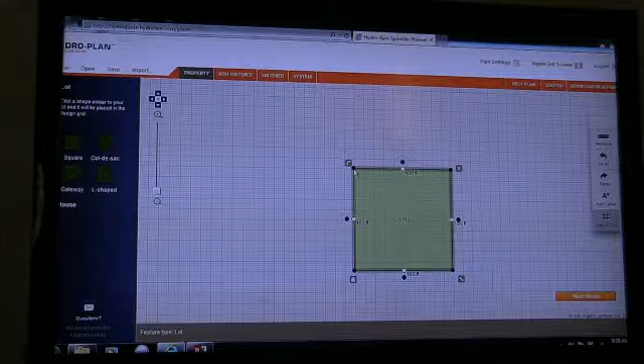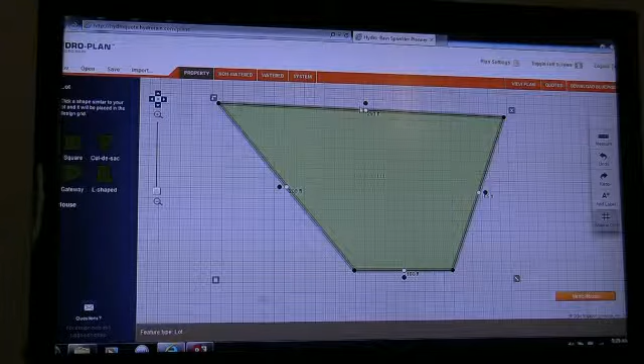So that's boring, right? So we're not doing that. Anyway, I could do it any way I want. So I increased it. I could click in between here.

And it'll give me two other spots. So if I have some kind of funky thing going on, right? Maybe they got some planters here. That's a little much. So you could really manipulate it and play with it, to really see how the layout of the property is.

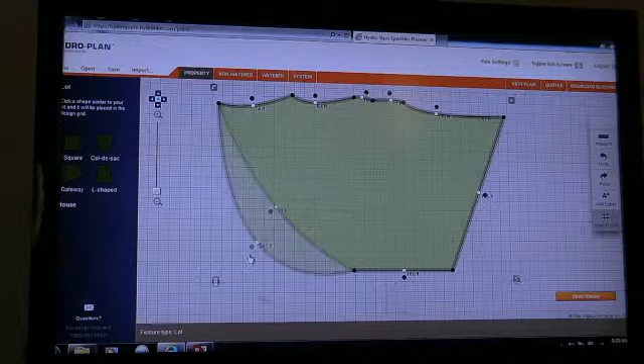Exactly, right, and that's what we want, right? We want something like that. And at the same time, it's giving you measurements right there as well, right? Yeah, this is telling me my footage, right? Okay, I'm gonna do that. So we'll say this is it, right? We have some kind of funky thing going on here.

Okay, so moving on, so next is the house. What type of house is it, right? I like the idea of having a courtyard house, right? That's pretty sweet.

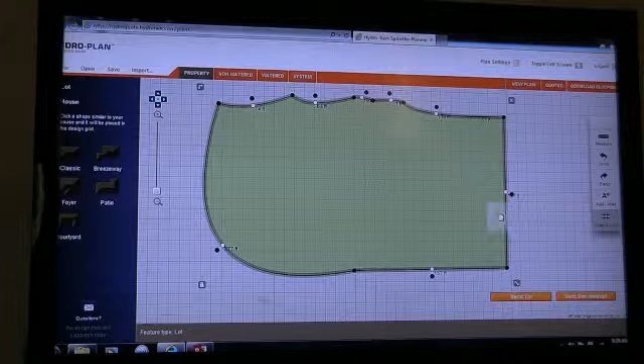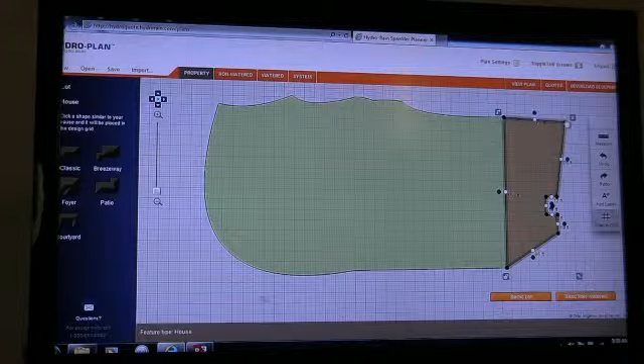Boom, rotate it here and bring it to the edges. And this is some kind of funky looking house, so let me fix that up there. That's a real funky looking house. There we go. So anyway, something like that, right?

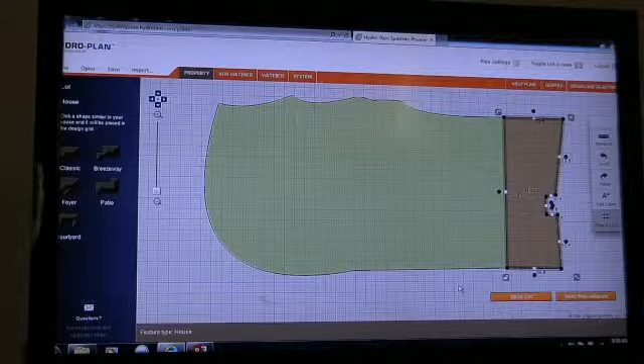So we got the house. Just for completion, right? Why do I need a house? I'm not irrigating the house. Well, I want to know, hey, I need to place my valves. I want it by the house, my electrical, my water meter, stuff like that. So there's a method to all this madness.

So now I'm going to click non-watered. So this could be all grass or not, you know.

Well, this is my dream house we're building, right? So of course I'm going to have a pool. Well, shit, I want a pool, right? So, pool, turn the pool around.

So this is where it gets important because it's going to design around this pool. 50 foot long for an pool.

So for an existing pool, you also utilize this and put it in place so that way you're telling the system where not to water? Yeah, we're in the non-watering thing, so it says mulch, sidewalks, everything's in here.

Okay, so I got a nice deck. I said deck. Don't put words in my mouth.

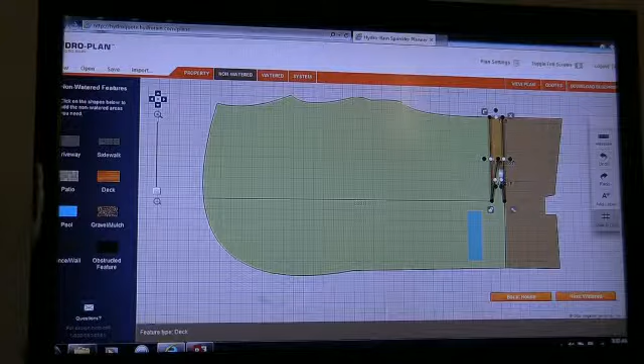Okay, so there we go. A nice deck. You can put driveways in case you're doing the front lawn or something like that.

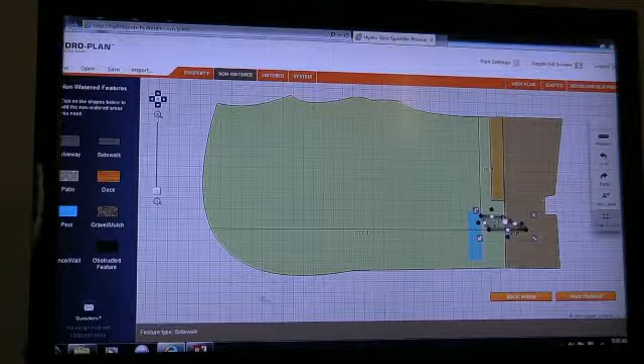We'll just put a little sidewalk here. We're just doing this for ourselves, so I don't want to get too into it - this becomes a game, like we're doing The Sims or something. Okay, so there's my sidewalk to my pool, blah blah blah, fencing.

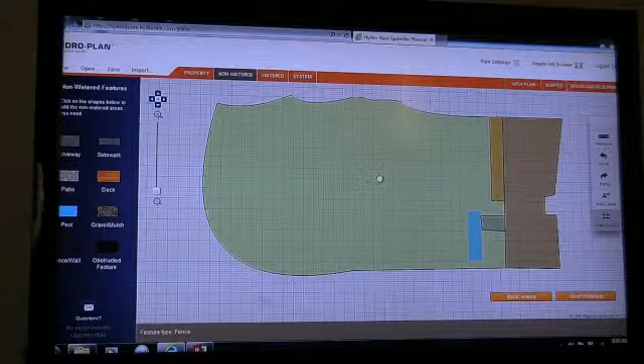If I have a fence, you could lock it so I don't adjust it. I could use that button to click it out. So if I have a fence around here, we're gonna say we don't have small children, so we're leaving it open.

Okay, so trees - this is important, right? Trees are very important, so let's move the tree here. Oh, double the trees. The cool thing about this is you want to do canopy area. Well, I got a big tree, right?

Hedges, shrubs, flower beds, right? So I click flower bed.

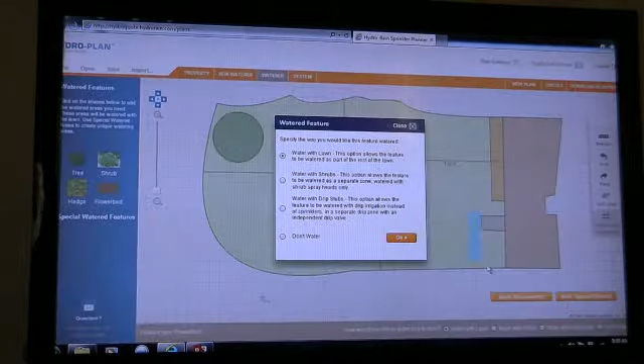Here's another interesting part where we can do it. We got options - water with the lawn, right? We all know that's not efficient. Water with shrubs - if I have any shrubs, I'll water it the same. Or do I want to water with drip? It'll ask me that, so that's important.

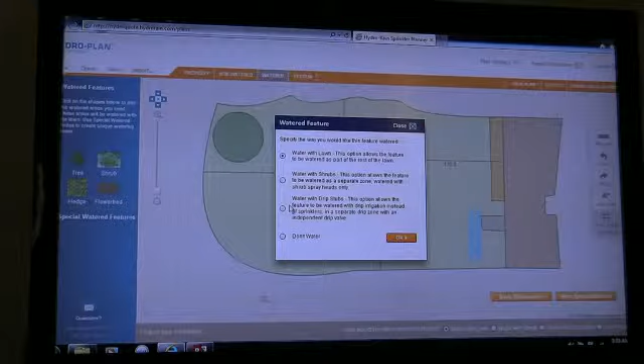So if I click drip or don't water - hey, this is my flower bed, this is my garden, I want to hand water this - it says okay, then it'll take it out of the equation. So there's a lot of flexibility in this.

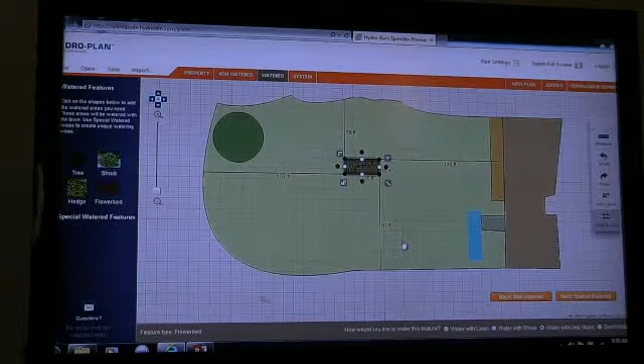This is things that we want to look at. Okay, so I want to do it with drip. I'm going to put it over here. I can't put it by the pool - the chlorine will kill it and all that kind of stuff. Alright, so I got a flower bed there and that's going to be drip. That's my little garden, so I come outside and do that.

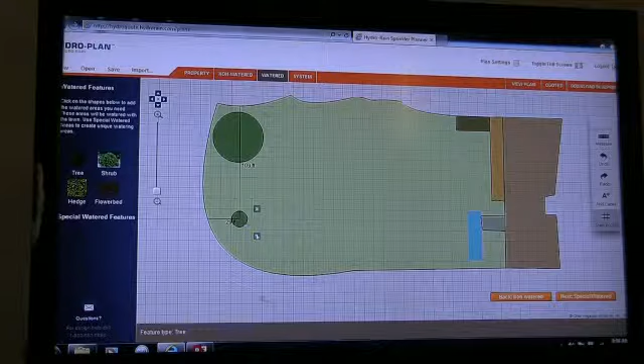Okay, shrubs, hedges - let's go ahead and put another tree because I love trees. Now I'm just doing this for fun. Okay, so I know there's a point - I mean, there's a point to all this. Alright.

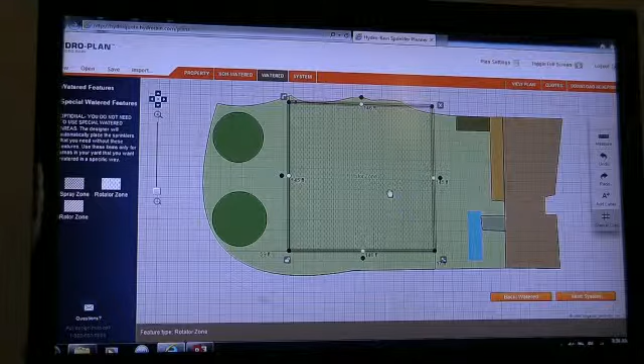The next thing is special watered. Do I have a specific type of spray that I want? I have sprays, I have rotors, and I have rotators, like MP Rotators, right? So if I click MP Rotators, well, I want to use the whole zone here with MP Rotators. Alright, so that's what you would do.

I'm going to not do that for this time because I want to show you how it'll automatically do it. So if you don't have to specifically pick certain ones, it'll do it for you based on the size, obviously. So if this is a huge grass area, we're going to use rotors pretty much, right?

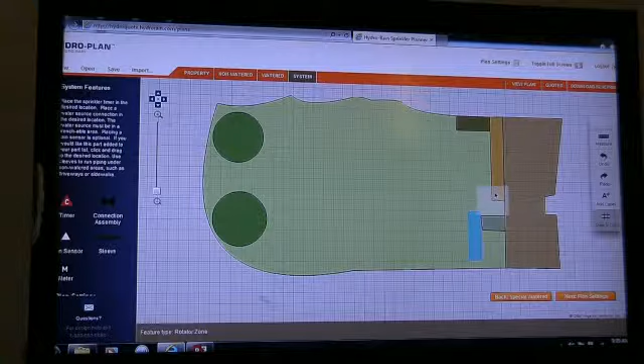Next, we're going to do the system. Now I got to tell where I want the timer. Okay, well I want the timer, let's say right there. So what it'll actually do is give me the length of wiring that I need, what gauge wire, or how much length of wire. Where's my connection at? Well, my connection is right here - this is my hose bib.

So it's giving me linear feet here, in case you want to go all the way straight through. No, it's just giving me a reference point.

Okay, reference point, okay - rain sensor, sleeves, water meter. So my water meter's out here in the front. That's important in case I'm running a brand new main line.

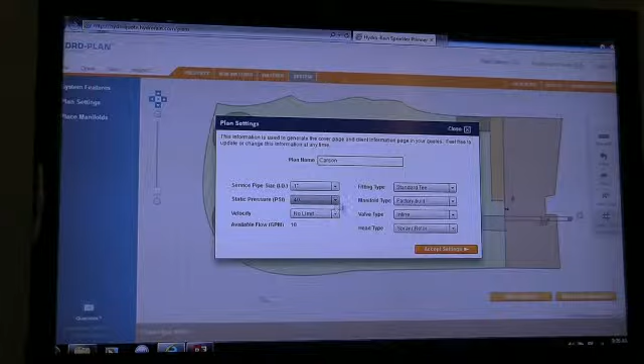Okay, I'm gonna click plan settings. So what's my ID? 1 inch. What's my static pressure? We'll say 65. What's my velocity limit?

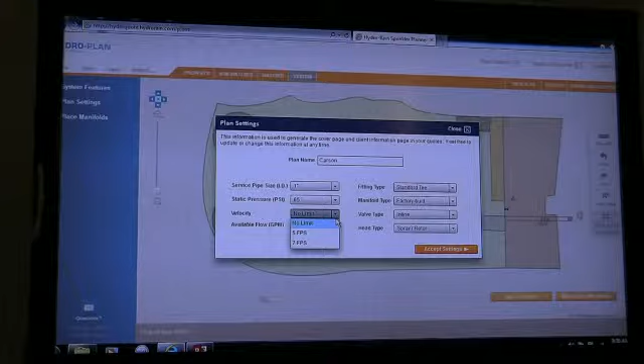No limit. We talked about the 5 feet per second, something that we don't want to go over. On the smaller sizes, they usually will do 7 feet per second. Okay, I just put no limit so it'll adjust.

So see right here it says available flow - my available flow is 18.5 gallons per minute. If I go to 5 feet per second, it drops 5 gallons per minute, right? Increase velocity, increase flow.

Lateral line side, it's not - I mean, when we're dealing with these, it's really important to stay below 5 on our main lines and our larger sizes, because that's a lot of volume of water hitting those things. That makes sense, right? Okay, so standard tee fitting.

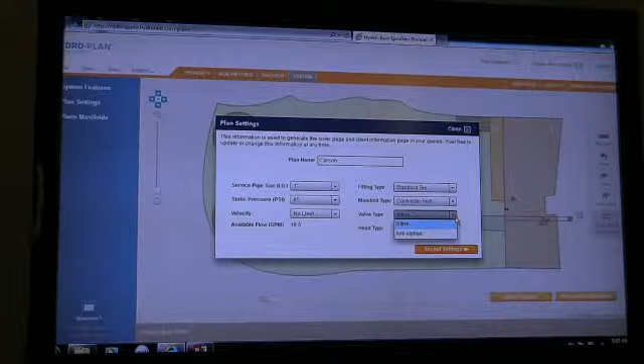Factory built manifold or contractor? Well, we like to build our own manifolds. Are we doing anti-siphon valves or inline valves? Yes, we're gonna do anti-siphon. Okay, and then our head types, so we accept those settings.

The next thing is place manifolds. So it tells me a little thing, meaning we're grouping the valves. It will automatically calculate the number of manifolds you'll need based on the gallons per minute and number of zones. So it's just giving me a notice, don't place it by utilities. So place manifolds, now it's working.

Okay, so it threw them way over there, but it just kind of placed them. Now what we're gonna do is click and move them to where we want. So we can move them here, let's stick them over here. So we'll place our manifolds where we want them.

See, originally when I started messing around with this, I thought they'd place the manifold where they want the manifolds, and I was like, that's kind of weird. Why would I run a main line all the way to the other side of the property and then run it underneath the tree? So what I figured is they just throw them out there and it's up to you where to place them. Exactly.

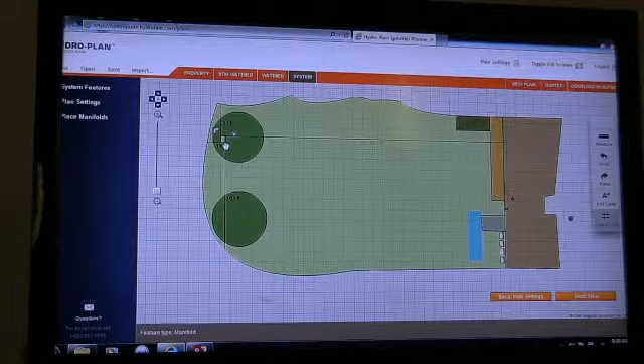I'm getting super picky about it. I don't want them overlapping and stuff like that. Anyway, okay, so we placed our manifolds.

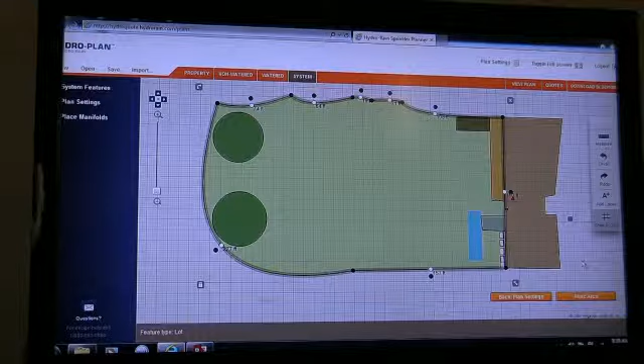So now the next thing is our arcs. When I click arcs, it's going to formulate and throw my sprinkler system out there. Ready? And working. Boom, there it is. So not only is it a beautiful piece of modern art, that's my irrigation system.

And then right here it's already telling you what nozzles and what heads you're gonna use. So we go here on the left, and it tells me how many zones I have, 17 valves. Something I noticed on this program is they tend to give me a lot of valves, but people tend to overwork their valves with the velocity being too high. Yeah.

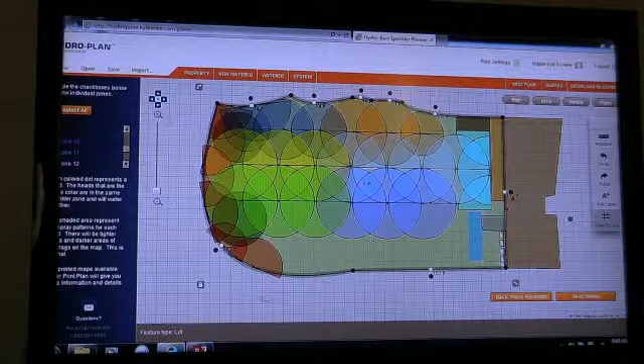So if I want to just isolate, I want to take away some of these guys because I want to see what each valve does. As you can see, as I turn them off, oh I should just hit okay, so deselect them all. So I want to see zone 1, it's back there, right?

So that's my arcs sprays. Zone 2, 3. Alright, so then you can go through, see what 5 is. You can see how they kind of group the fulls together, because these are going to be rotors, that's what you want to do.

What if you don't want them like that? What if you want them to go in sequence, start from the house, 1, 2, 3, 4? That's just however you would wire it up. You just wire it up however you want. Okay then.

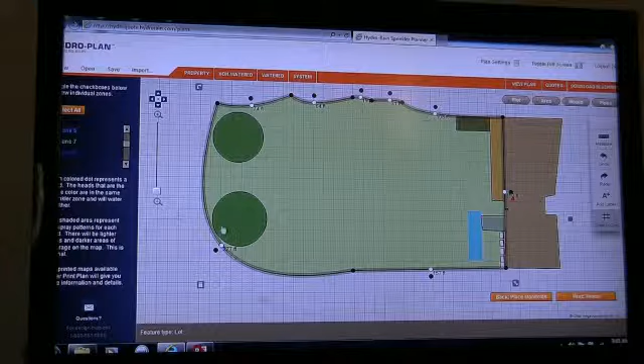So I hit heads, that's where all my heads are. Okay. Pipes, that's how I run my pipes. Wow, so you can see the value in this.

And here's the kicker, here's my retail price with tax included, and then here's all my parts. And now this was all done in Blu-Lock. This is what it does. Oh, it gives it to you all in Blu-Lock. So you can adjust, but another benefit of this is you save it, you send this to the distributor, and they can pull the whole order and have it shipped to you.

As opposed to writing it down yourself and going out there figuring out how many heads you're gonna use. So for all that, this is what, when I found this and was shown this, I really enjoyed, because I started doing some residential stuff.

And I'd go there, you know, I'd have a call in, I'd go there, let's say I have an hour down. I meet with the owner, owners chit chat a lot, we'll say we lose half an hour there. I walk the property, I'm taking measurements, I spend at least an hour and 2.5 hours. I get back, tell them I'm going to come up with a price and everything like that, and I'll get back to you. So now I'm at 3.5 hours.

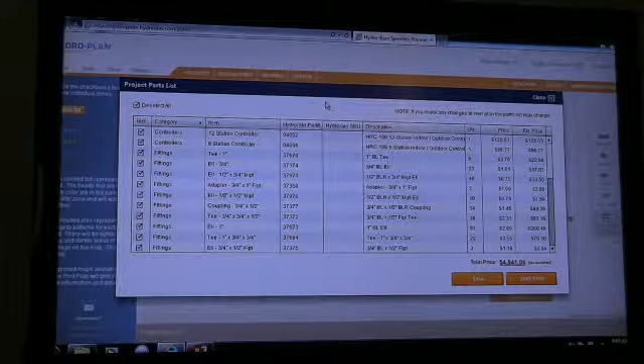It took us not that long, maybe 20 minutes. I could go back to my truck, do it real fast, and come up with this price, because this is the most important price — our list price of our parts.

And then this gave me everything. So I say, well, they have a controller, so I could take these controllers off — see, I drop my price. Well, they don't need X or Z, or they don't need valves, so I can click valve off. So I'm dropping the price.

One of the biggest costs here was pipe — running all those pipes. That's half of the price of the whole project. So you can kind of look and tweak and do all these things, but it really comes down to the speed and efficiency, and that's what the whole Hydro-Rain thing is.

And it tells you the layout of each size of the pipes, right? It tells you where, say, 1 inch is if you're starting off your valves, or your valves are 1 inch, and then you start out with 1 inch out of your valves.

So the benefit, like I said, is the speed of this. Now, am I going to use this exact layout on the job? Probably not exactly — you never design a plan and then do it exactly, because you might get there and think, if I ran this trench here, I could do this or that, it'd be better. But if they say yes to you, then you go back and tweak. Just don't go do all that work and tweak it without getting paid for it.

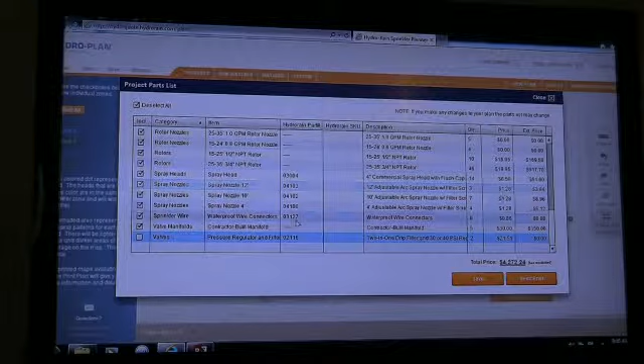And maybe, like I said, when you import a picture of the property and build on it, then you know exactly. How come there's no prices on the nozzles? Well, nozzles are free — they're for rotors, and when you buy the rotor, you get the nozzle tree for free. It's got the nozzles on, you pay for the nozzles on the sprays, on the spray head.

Yeah, so it breaks it down for you completely. It even gives you your connectors, and it gives you a really good breakdown, because I did drips too.

So yeah, if you go to save and print, let's look at the plan, what it prints out for me.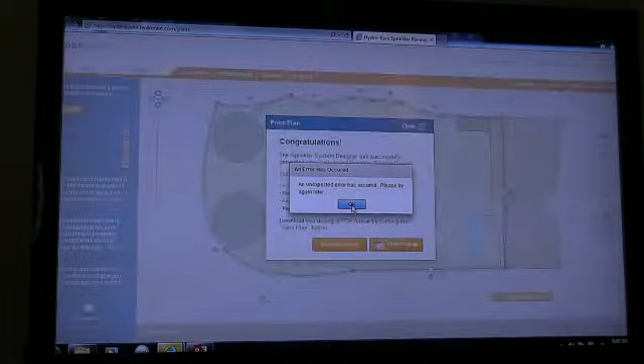Don't you know you're going on YouTube?

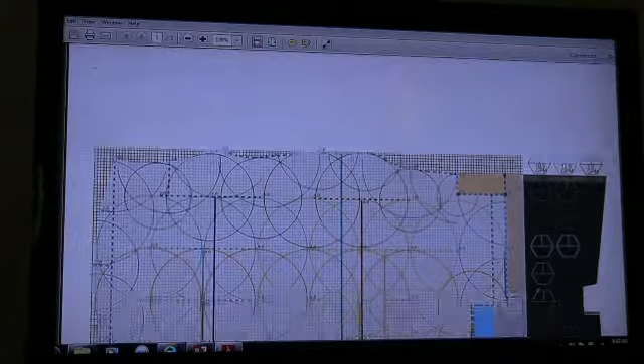Alright, so this is what it prints out for me. It gives me the whole property, tells me my valve, the size of the valve, and the gallons per minute in each valve. So we had 18, but really, there's only one, number 15, that gave me 16 gallons per minute.

So all the other ones are under that, so you could probably jump a couple together. But they sized them this way because you want your fulls on one circuit if you can get away with it. Otherwise, you got to mess with nozzling, and you're working with uneven watering, which is not a good thing.

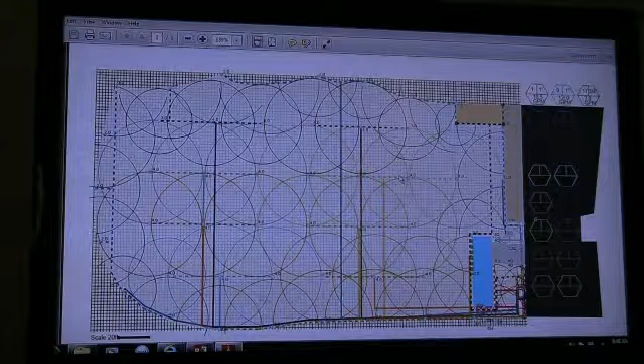So this is the HydroRain HydroQuote. Like I said, it's a useful tool, and it is just that — a tool, just like anything, but I enjoy it. I think it's cool, especially if you're just going to do drip. If you're going to be doing a lot of retrofits, you could totally do this all in drip, and it'll give you everything you need.

Wow, it's the future — everything's handy. So yeah, any questions on it or anything? Nice, no, it's pretty awesome, huh? Yes, it is.